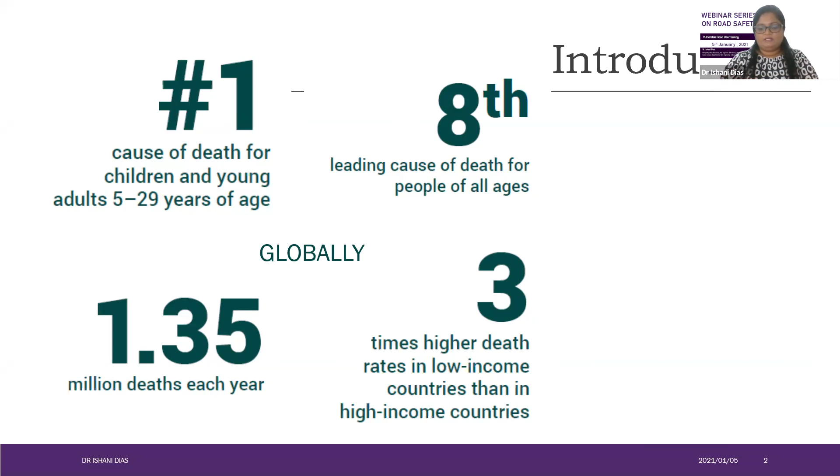When we compare the road safety situation between low-income countries and high-income countries, it was found that the death rate is 3 times higher in low-income countries compared to high-income countries when it comes to road crashes.

If I look at road crashes in Sri Lanka for 2019, according to the published crash statistics from the National Council for Road Safety, 32% of road crashes happened due to or related with motorcyclists. Next comes pedestrians. If you look at the other vulnerable users, we have bicyclists at 5%, and pedestrians at 18%.

If I take all the statistics, over 38,000 crashes occur every year in Sri Lanka, looking back the past 10 years or so, and about 3,000 people die on roads every year in Sri Lanka, regardless of category, age, or other characteristics. So approximately 14 deaths per 100,000 population, which is more or less the same as the Southeast Asia Pacific rate considering population and death rate.

If I look at vulnerable road users, to begin with the discussion, first we have to identify who is a vulnerable road user. Those are road users with the highest risk of meeting with a crash, as well as, after meeting with the crash, having the highest possibility of ending up with the most severe impact or injury severity. Compared to other road users, vulnerable road users are particularly exposed to injury as they are not protected by a shell, as a vehicle would provide, when they are a pedestrian, cyclist, or motorcyclist.

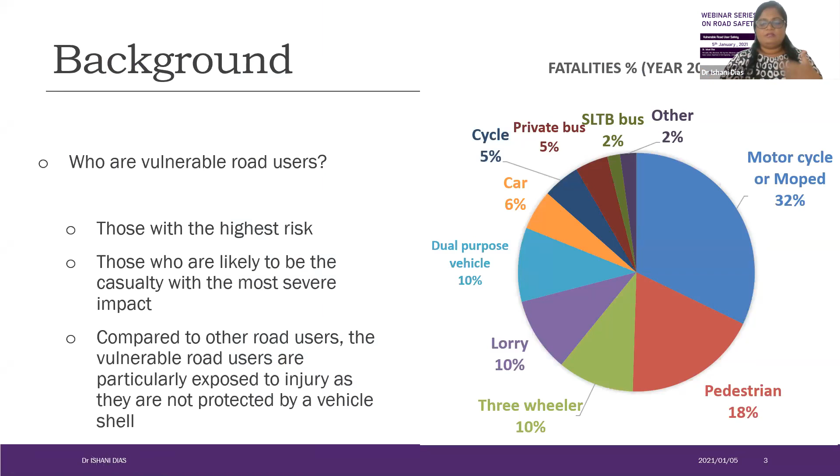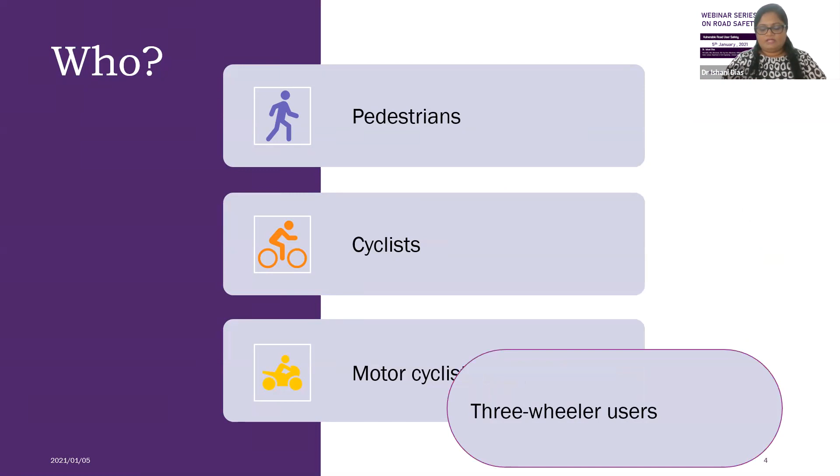But if I go back, you can see that three-wheelers are also coming a little higher compared to the recent past. Three-wheeler road users have also been identified as significant numbers in casualties. So I think modern and new researchers will have to think of three-wheeler road safety as a vulnerable user as well. But up to now, globally, it is not recognized as a major threat, unlike in Sri Lanka. So I would like to add that as one vulnerable road user.

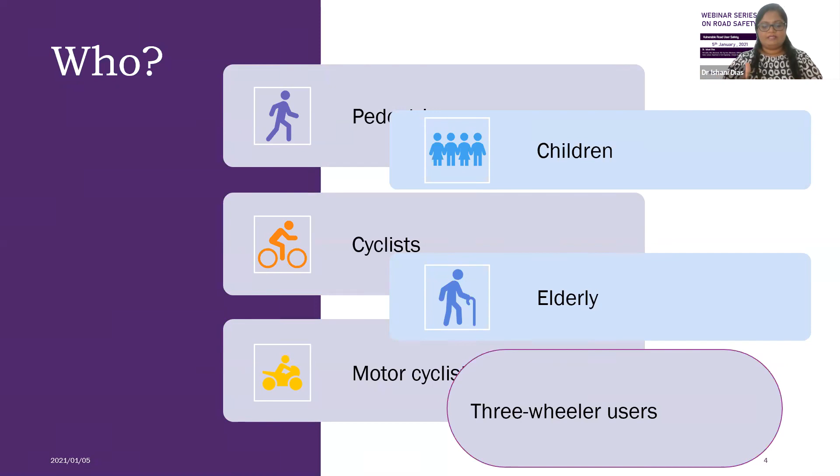And regardless of the vehicle type, when the age of the road user is less than 15 years old or greater than 55 or 60, we consider them as children and elderly respectively. So they are also considered as vulnerable road users. Other than that, young drivers and elderly drivers are also considered as vulnerable road users, because in that case, they are more likely to cause a crash as well.

So then what we should think is why these vulnerable crashes happen, and why these vulnerable users have ended up with higher injuries. It has been recognized in much literature that being less protected than a car occupant is the first reason why they are vulnerable, and the lack of separation from other road users is the next thing identified in literature.

That is, when you are walking or cycling on the road, the protection you have against motorized traffic is really important for the pedestrian or cyclist to have a safer feeling, and to reduce conflicts with the motor traffic. In the conventional way, we would put a safety fence or an elevated sidewalk. If you take one step down, mostly what we find is the white lane marking separating cycle lanes for cyclists, and as I learned recently, for pedestrians for shared use.

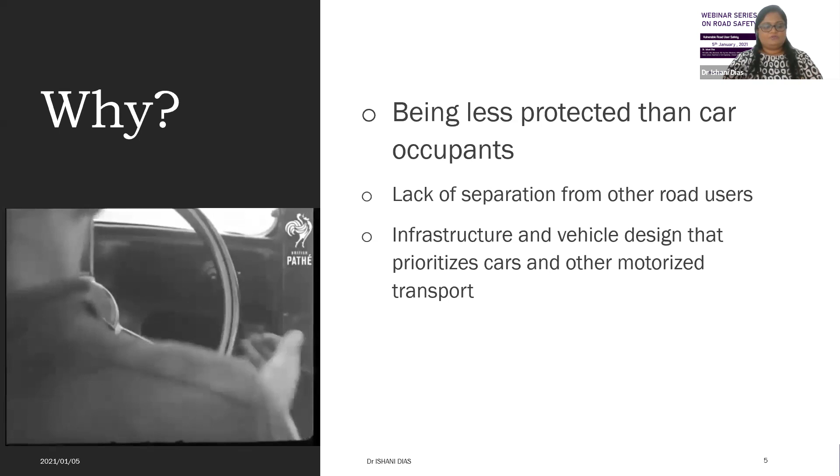So I have a small video clip here. This is from 1939. This shows how they tried a vehicle retrofitted with a scooping technique, so that when people cross the road, the driver has to manually operate this scoop so that he would not run over pedestrians suddenly darting out off the sidewalk.

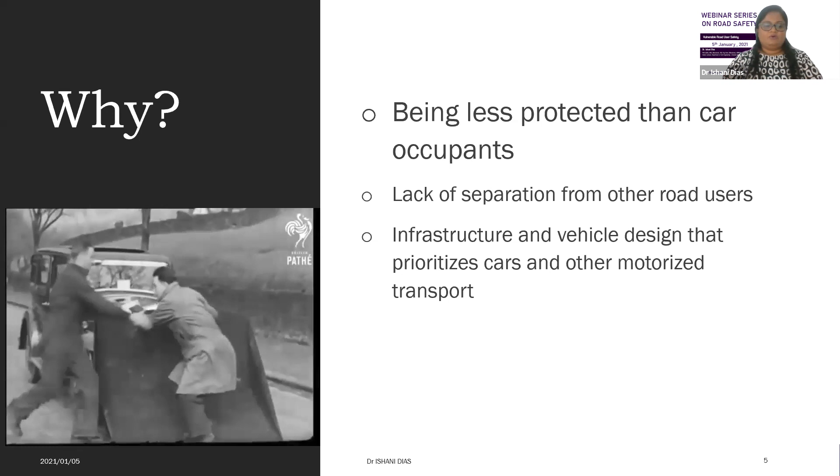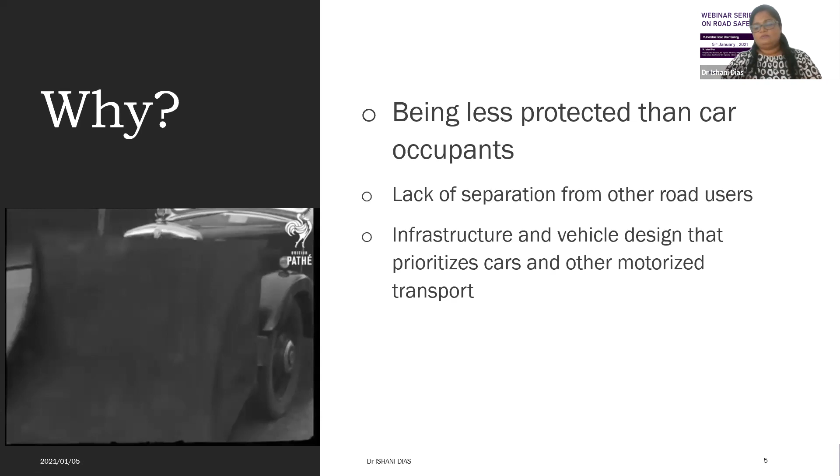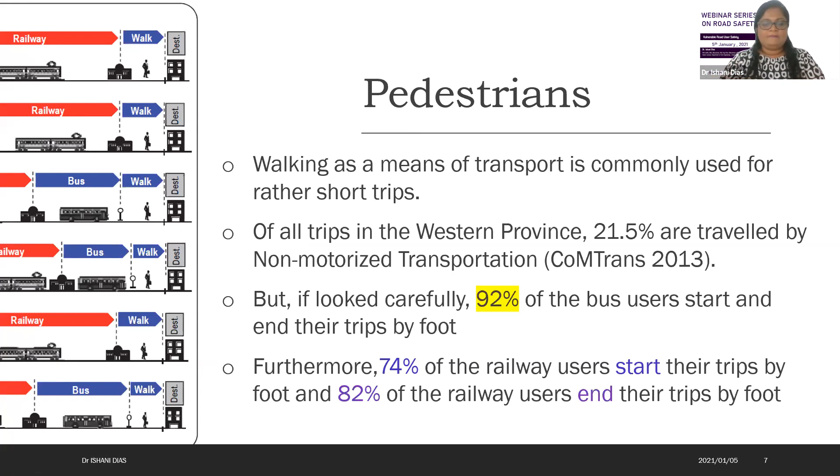So if we look at where they were walking when they met with the crash, in other countries the crash report card has off-road, on the road, parking lot, that kind of variety of data categories. But in Sri Lanka, we do not have such a pedestrian location category. What we have is whether the pedestrian met with a crash near a crossing, within 50 meters of the crossing, at or near an intersection, things like that.

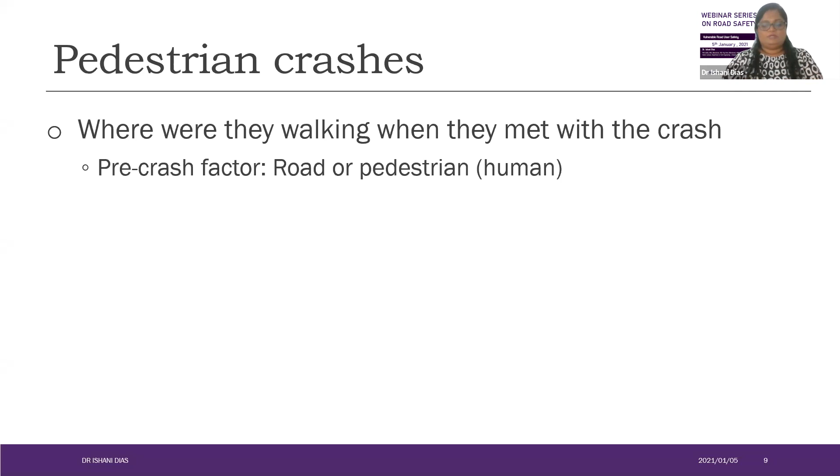So again, we do not know whether at the location where the pedestrian was hit by the vehicle there was a sidewalk or not. So ultimately, we cannot find who's at fault, the road or the human, right? Do we have sufficient pedestrian facilities to blame the pedestrian for walking on the carriageway? So parallel to enforcing jaywalking or finding the pedestrian fault, we have to improve pedestrian facilities. And even if we have good pedestrian facilities, the attitude of society takes a great toll on the road safety situation in the country.

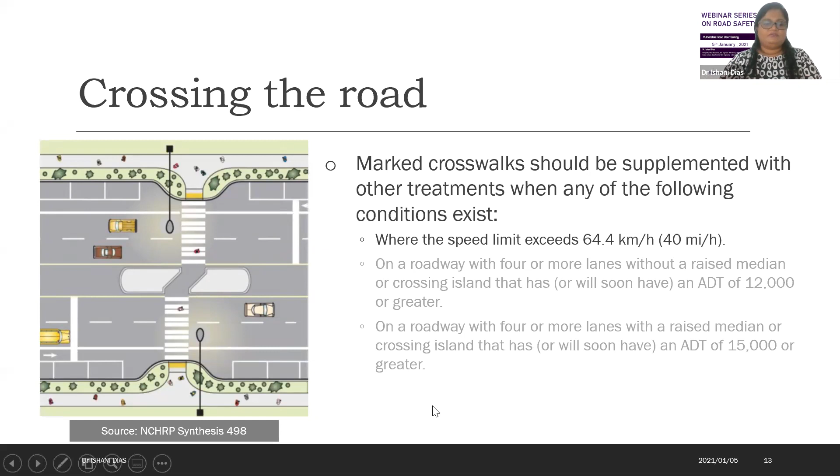So marked crosswalks should be supplemented with other treatments when any of the following conditions exist. Just because you put a marked crossing, that does not mean you're facilitating the pedestrians. Because you have to see what's the speed of the vehicles coming towards the crossing, what's the environment, and what kind of behavior the facilities would encourage.

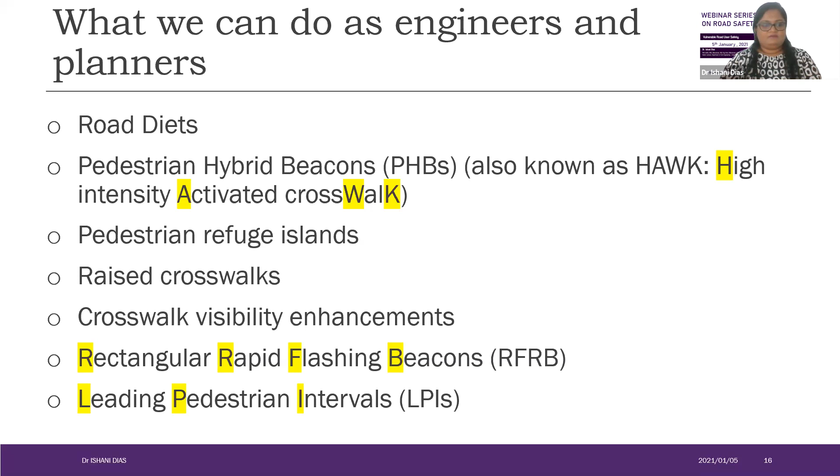Then the next category is the cyclists. The number of cyclists on Sri Lankan roads is very, very few. But if you consider crashes, there are about 2,000 crashes involving cyclists in Sri Lanka. But of course, considering the population, it is less. So because of that, I didn't do much crash analysis on cyclist crashes. In other countries, there's a tendency of a high proportion of single cycle crashes, but in Sri Lanka, it is not. 95% of the time, it was two vehicles, one being a cycle and another being another vehicle.

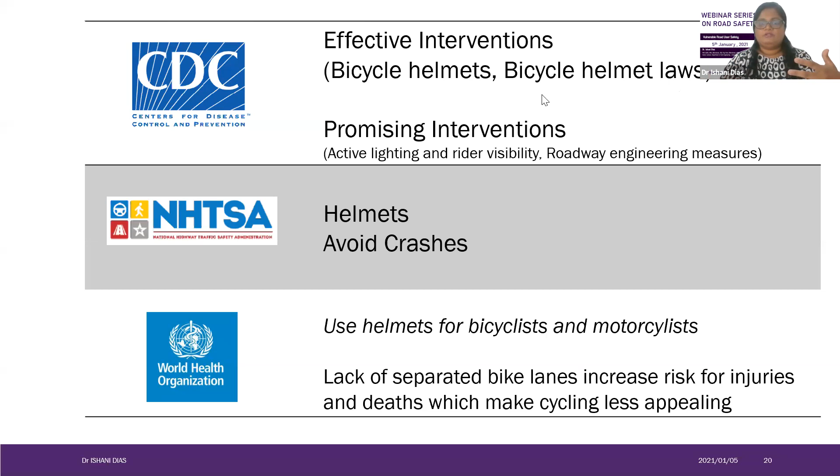In Sri Lanka, we do not have rules like even the helmet regulation for cyclists. So we are lagging behind in many aspects. These are some places where some institutions have posted guidelines or statements regarding cyclists. Majorly, they are saying use of bicycle helmets would be good, and lack of separated bike lanes increases the risk of injuries. And NHTSA is saying prepare yourself before you move into the road or before you start your journey, that kind of thing.

And again, majorly in Sri Lanka, at intersections, they forget about cyclists completely. So that's again an issue. And actually that reflects in the lesser number of cyclists on the road.

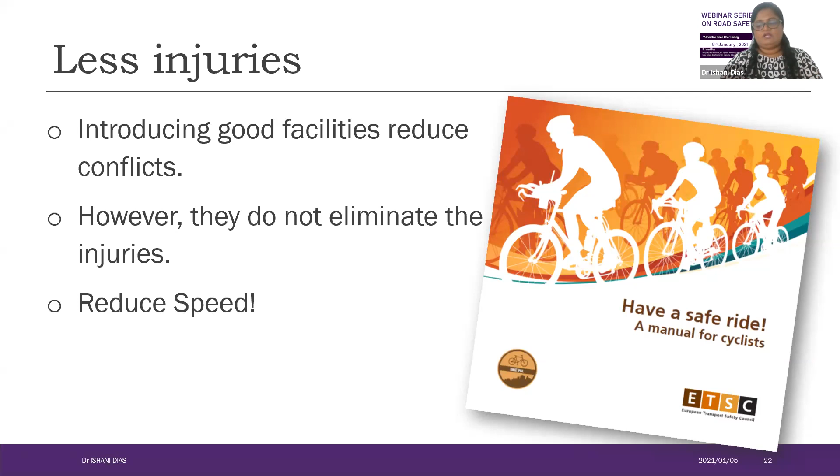So by giving more facilities, we can reduce the conflicts. But again, even with the few number of crashes, to reduce the injury severity, we have to reduce the speeds. And some countries consider speed limits for the cyclists as well.

Again, about motorcyclists, this is a very broad area, which I'm not going to go into in too much detail. About 14% of the trips in Western Province itself are made by motorcyclists. If you take all the motorized trips, it is 18%. But if you take the annual number of crashes involving motorcycles, 20,000 motorcycles are meeting with crashes every year. So that is an alarming number.

And the next category that I mentioned is not a road user category, but the age category in the vulnerable road users. So each year, if I first talk about the European statistics, which has a higher population, 700 children under the age of 15 are killed, and about 100,000 are injured. And in Sri Lanka, we have 2,500 children-related crashes annually, and about 200 kids die on the road on an annual average basis.

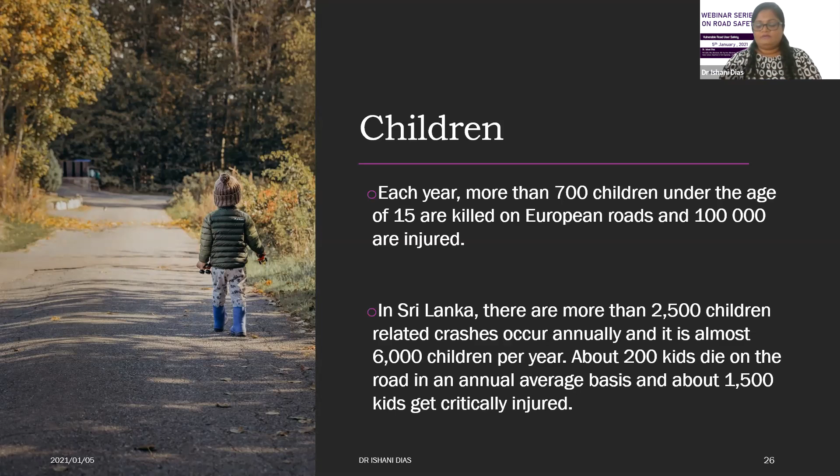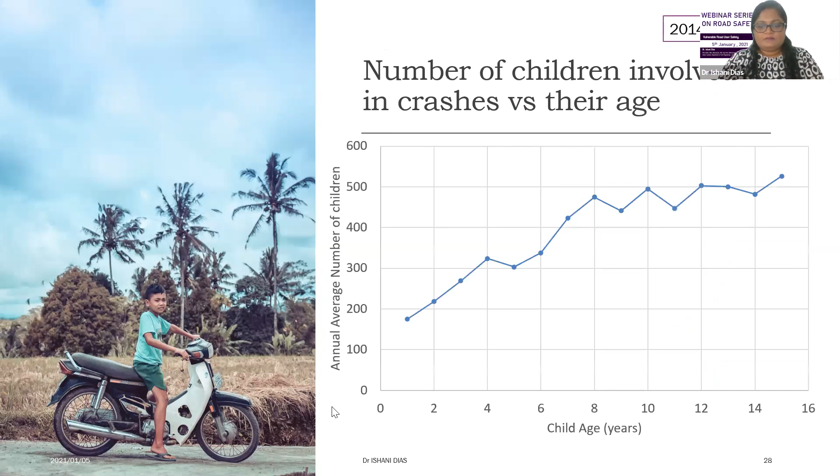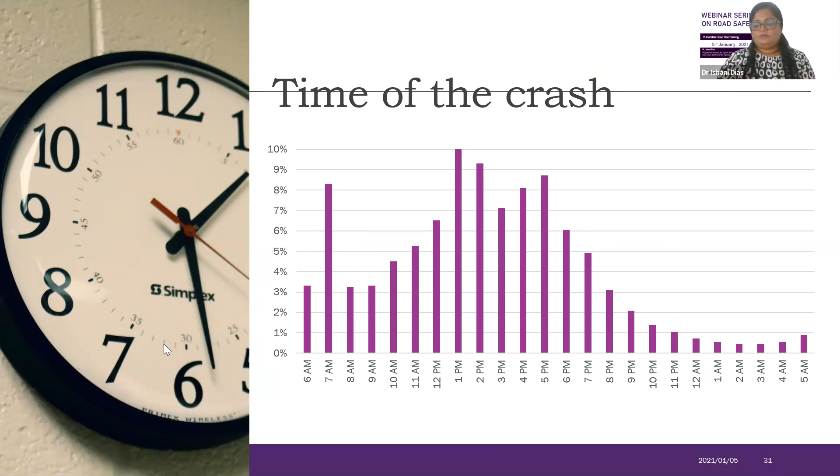And the time of the crash, if you look at it, sorry about the line on the title, 7 to 8 a.m., actually the school starting and ending times, you can see the peak crashes, which is obvious, but here are some facts to find out. And you can see 5 to 6 p.m. also, maybe because of tuition or the time they are going home.

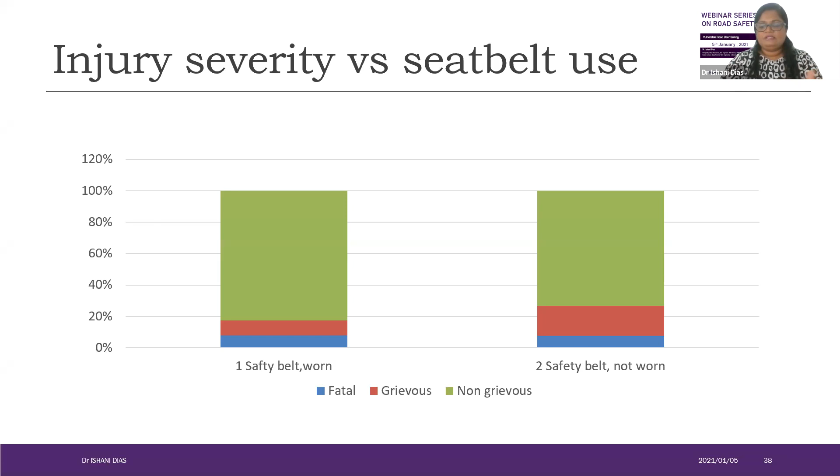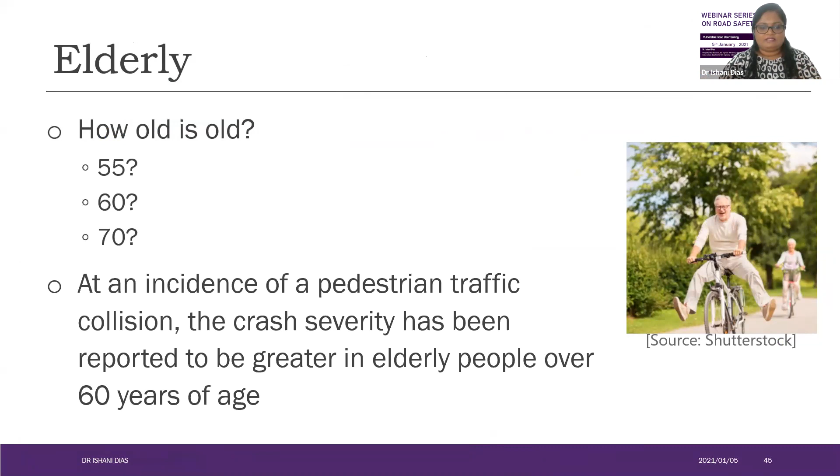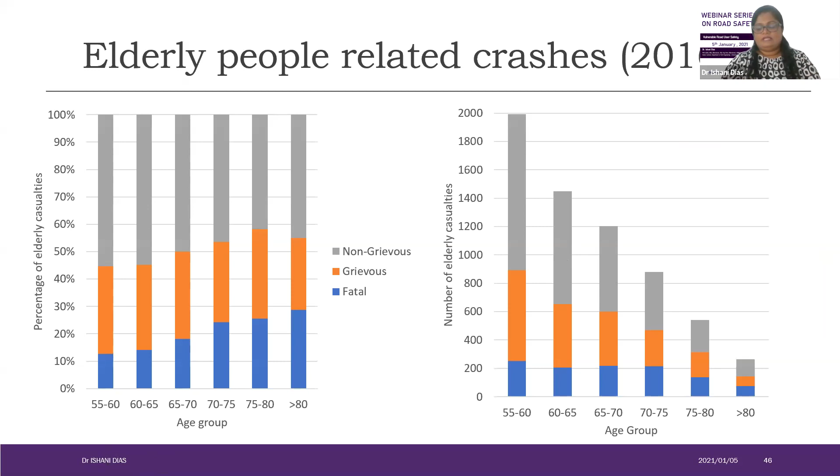And the next one is the elderly. How old is old is considered as many different ages in different countries. Finally, I realized that it ultimately ends up with the age when a person retires. So when I did the crash analysis, I used from 55 and above, and you can see the fatality rate increases with age from 55 to 80, which is not surprising again.

In summary, during the last year, in so many webinars that we participated in, they were all taking this as a good situation because people get to think about public transportation a lot, safer transportation, and found this pandemic giving a unique opportunity to rebuild our cities. So rather than going for short-term plans, thinking about the big picture and planning ahead. So these vulnerable road users need to be given attention in the long-term plan, not only in city planning, but also in national policies in transportation.